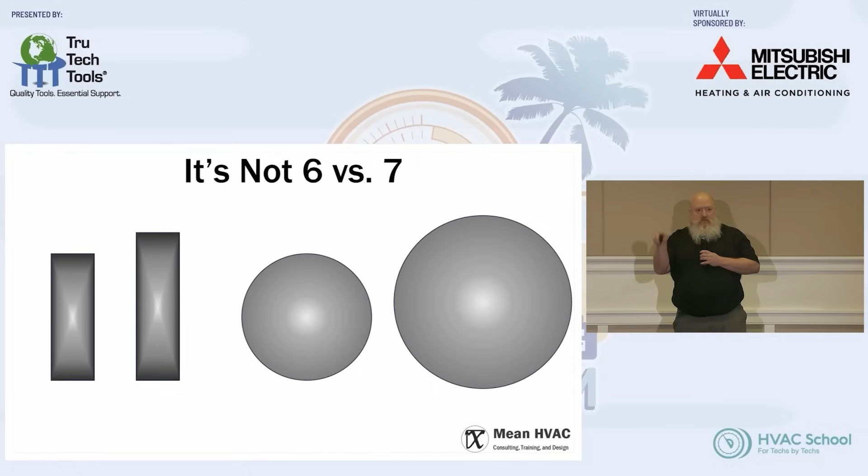So the difference between a 6 and a 7 is a 28 versus a 38. It's not a 17% change, it's a 36% change.

It's really easy to look at something and go, I mean come on, it's supposed to be a 7, they got a 6, it'll be fine - because 17% doesn't sound like that much. But it's not 17, it's 36.

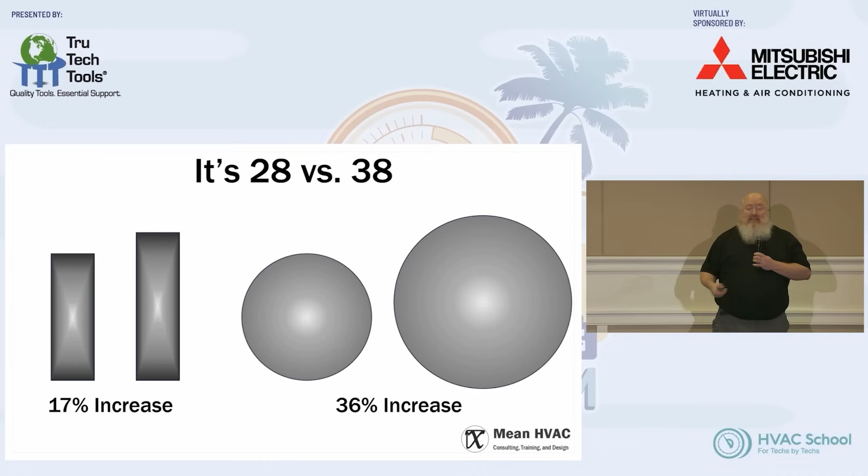How you size a duct matters. Duct sizes increase on the red line, not on the blue line - it's on the square, it's geometric.

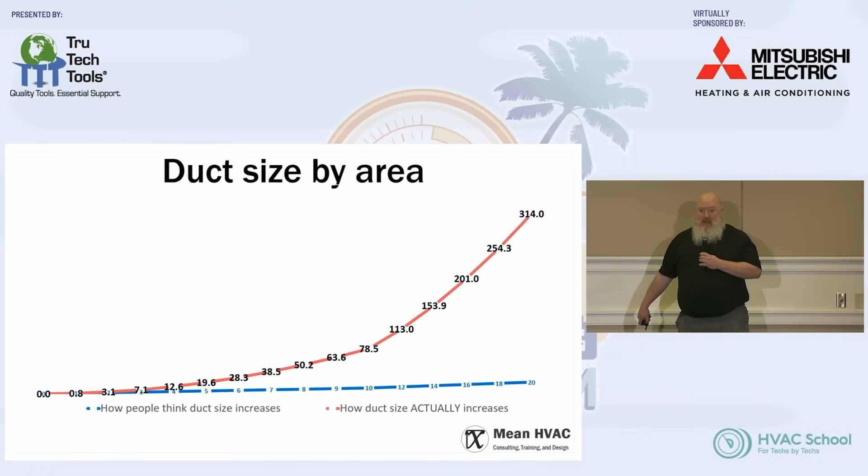This is where the David Bowie part of the title comes in - we're going to talk about pressure. Static pressure, velocity pressure, pressure loss, external static pressure - four unique concepts. Most of the time in the HVAC world, we just say pressure.

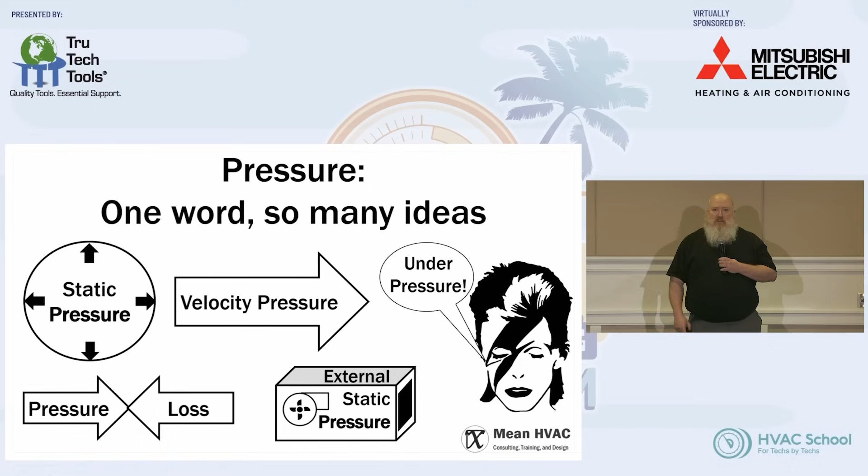There's no question whatsoever as to why this can get so confusing. If we're going to use one word to mean four different things, you are going to get confused.

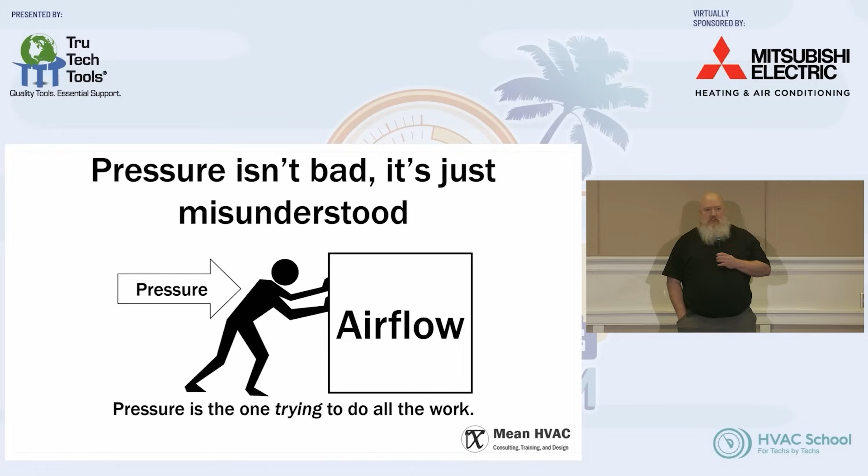First of all, pressure's not the bad guy. If you don't have pressure, you don't have airflow. Pressure is the one doing all the work. Pressure is the reason we have airflow.

We often say when we have airflow problems, we have too much pressure. Well, no, you don't have enough. You have too much static pressure or back pressure. But if you could create more total pressure, you'd have more airflow. Pressure is doing the work when we're talking airflow.

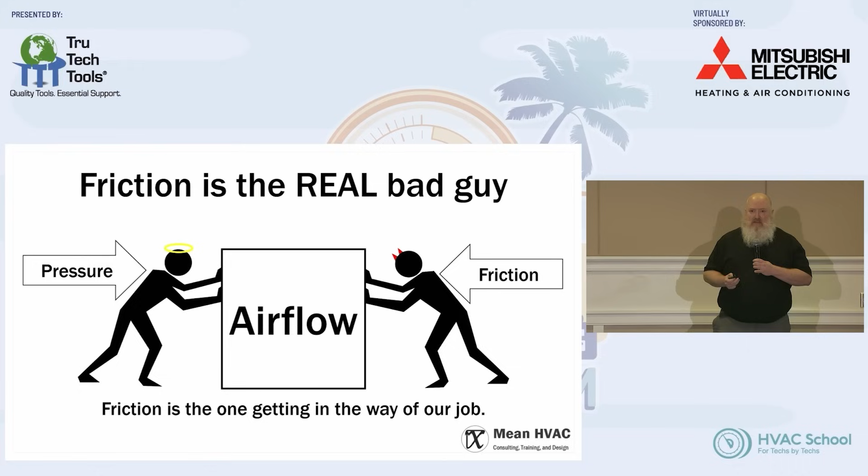Friction is the bad guy. Friction is the reason you're not able to do your job and deliver the airflow you're trying to deliver, not pressure. So understanding pressure is pretty darn easy.

I like thinking in terms of PSI, pounds per square inch - tells you exactly what pressure is. It's a force spread over an area.

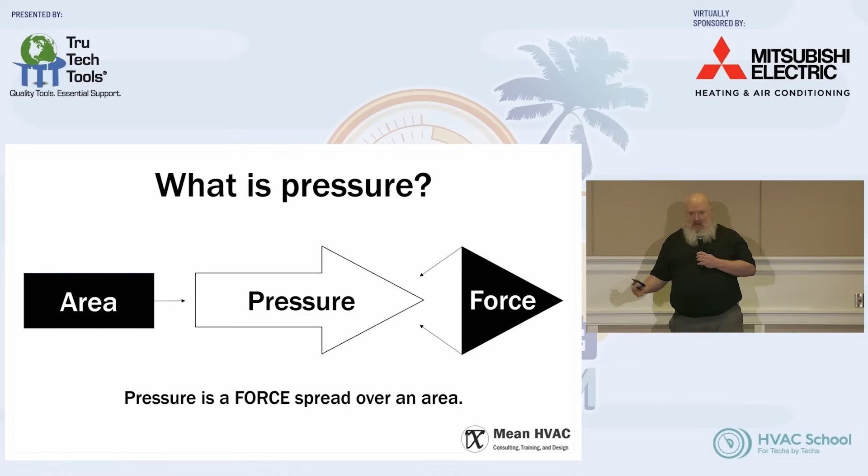Friction - anytime you have resistance to anything, that's friction. They talk about friction in financial markets. Anytime you're trying to do something and something's trying to stop you, you could call that friction.

It is really common to think that airflow is somehow caused by how much room there is in that opening. It has nothing to do with that - it's just accumulated friction, and it can be difficult to identify the actual problem.

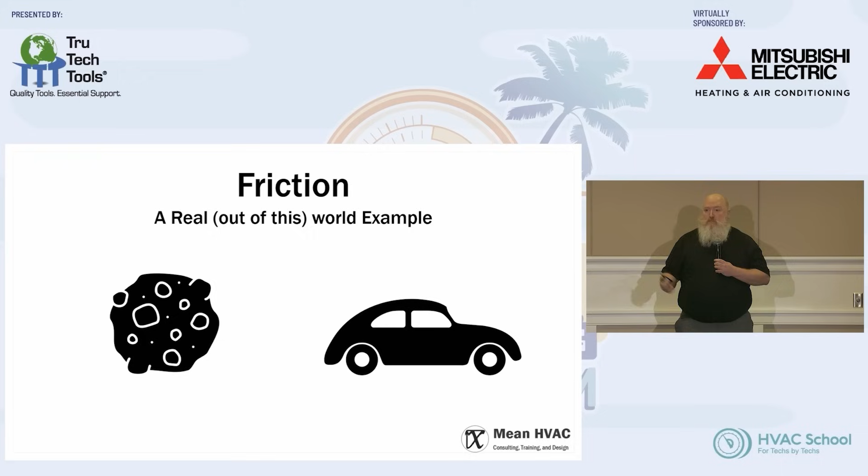One of the primers I like to throw out there is: imagine an asteroid the size of a Volkswagen Bug. About 20 of these per year come hurtling toward Earth. None of them hit the ground - they burn up.

A giant rock and metal object comes flying to the Earth, and the only thing that burns it to a crisp, vaporizes it, is the friction of the air moving across the surface. It's the same thing at play in ductwork on a ridiculously smaller scale - it's the friction of the air moving across the surface or changing directions.

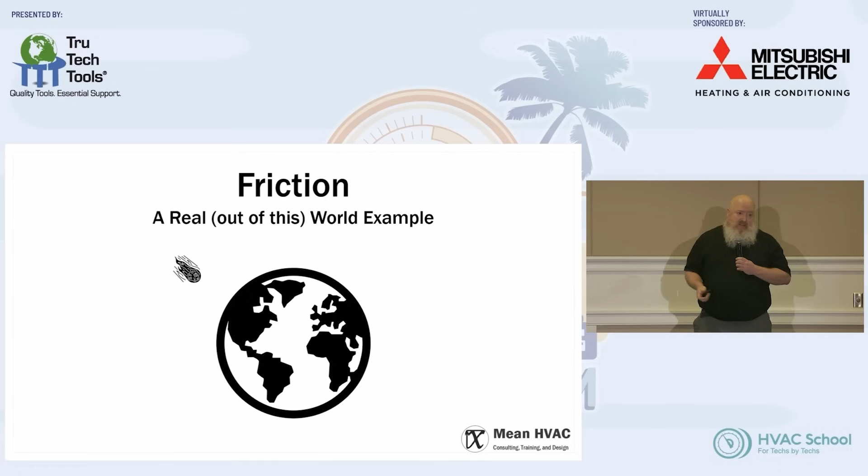So Ty Branaman and I - he's my man, he's my mentor if you will, or my idol.

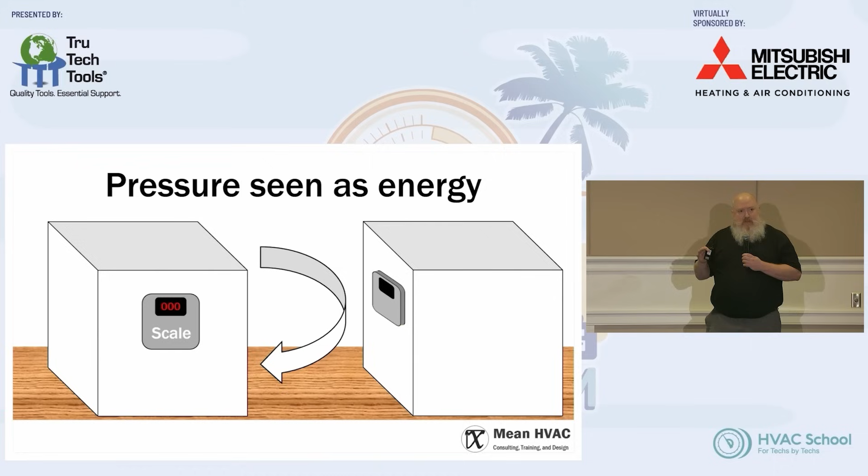Idol's a better word. Being able to visualize what's happening is really key to understanding, and air's invisible, which sucks. So if you want to understand pressure, maybe we should understand something a little more physical, a little more tangible, like a giant crate with a bathroom scale attached to it.

If you pushed on the scale and you were on a low friction surface, like a sheet of ice, it will move away from you pretty easily. And what's going to happen to the number on the scale? Not much. Because you're putting energy into the system and it gets used.

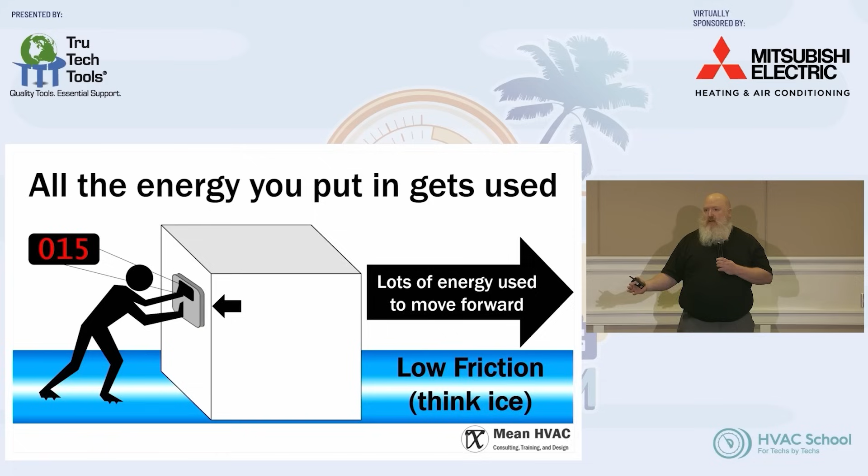It moves. The number on the scale goes up when the energy gets wasted to friction. And so when I push on it, it just flows away from me. The scale number doesn't do anything.

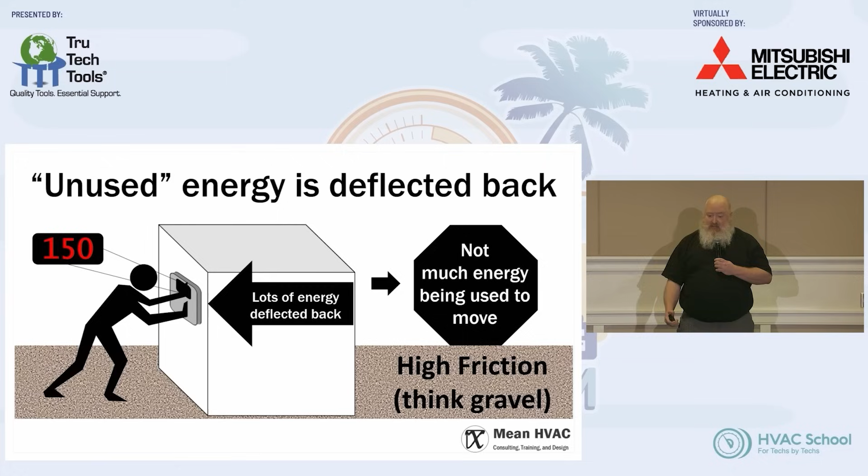If we put it on gravel, we can get a very different result. We could push the same amount, and it's not going to move very far. But that scale number is going to go way up, okay? Yeah, just physical normal sense, right?

The same thing is happening in a duct. We have the energy we use and the energy we don't use. Our job is to move air. When we're not doing our job, the air is doing something else instead of moving. It's being deflected. So I kind of need two hands for this little demo, but air isn't going to go in two directions at the same time, obviously, or two opposite directions at the same time. We can't have that in the duct.

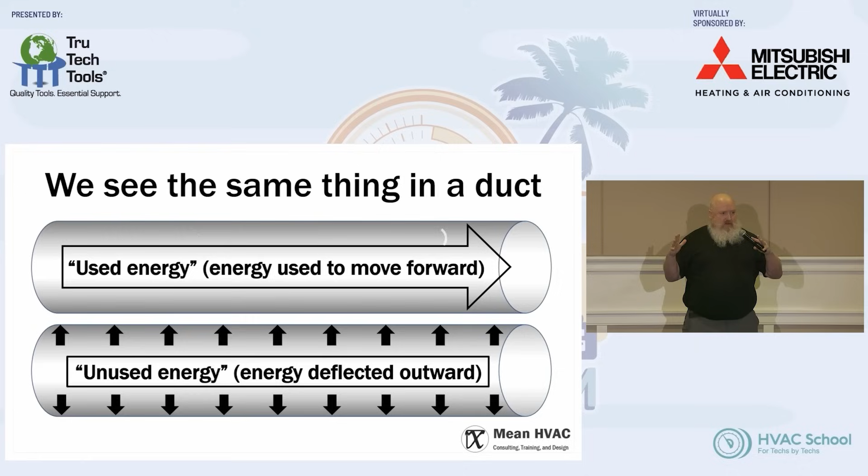So if I have a force going this way and a force coming this way, if it's the losing force, friction is the losing force, it gets deflected at 90 degrees. It pushes outward, okay? And a lot of you know this, we have names for that. It's velocity pressure, static pressure. Velocity pressure is the energy we're using. Static pressure is the energy we've lost, we've lost it to friction, okay?

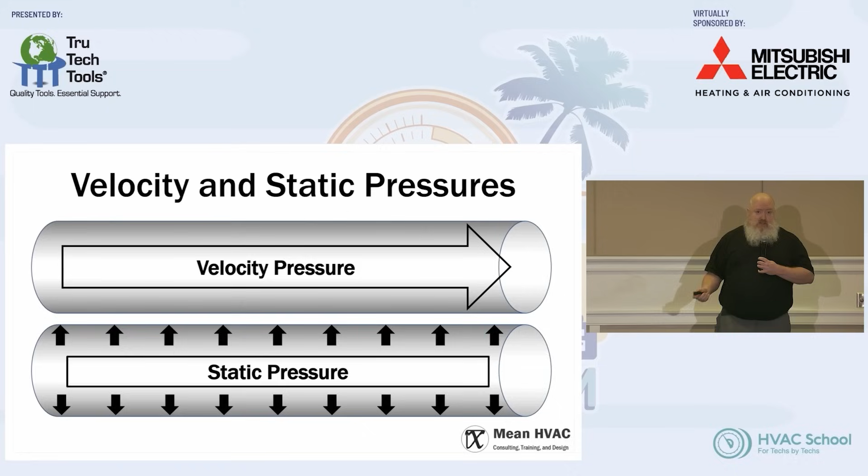So pressure is always in balance, right? Engineers like to say pressure is always equal. Oh my God, I taught people how to do manual D, and I was teaching them how to do manual D. I followed the process. I had no understanding of what was actually happening inside that duct system.

Legitimately, I didn't understand this until I got tricked into doing a presentation to a room full of engineers. And they didn't tell me they were engineers until the night before the presentation. It was the last time in my life I pulled an effective all-nighter watching YouTube videos trying to learn how this works. And when I figured out that pressure is not equal, because it's the same here as it is down here in the duct, pressure is always the same, or always in balance, excuse me, at that point.

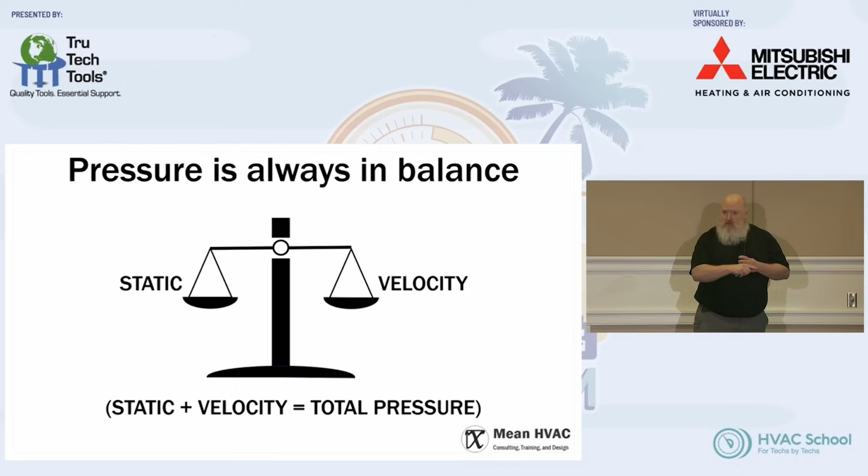At one point in the duct, you've got a certain amount of energy. Whatever you're using to go forward, you're not using to push outward. Whatever you're using to push outward, you're not using to go forward. These two things are in balance. It's one of those things where turning it into an equation is almost silly. This is just what happens. Of course it does, right? You can't use more energy than you have, and you can't use less. That's it. That's all it means.

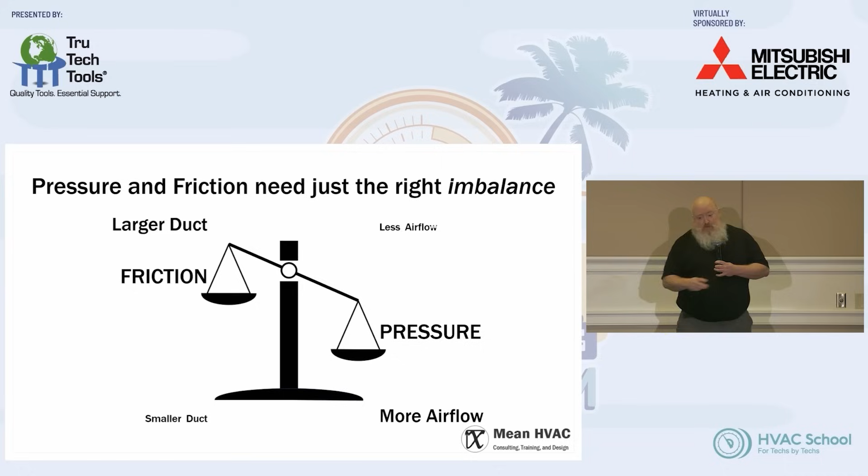And so we have two oppositional forces here. If you have larger duct, you have less friction. Smaller duct, you have more friction. And then you get the pressure side. Pressure's moving the airflow. If you have more pressure, you're going to have more airflow. You have less pressure, you're going to have less airflow. So this is Mr. Static Pressure right here.

It's silly, I know it. But if you want to understand static pressure, this is where the used car lot comes in. Legitimately, sometime after I did an all-nighter watching YouTube videos on pressure, I was sitting next to a used car dealership, and one of these guys was going. And it just randomly occurred to me that this is probably the best demonstration of static pressure and velocity pressure being in balance that you can see, okay?

When he's like this, all the energy is velocity. And so this one actually, I should have tested it before I brought it up here. The fan's a little overpowered on this guy, he doesn't like to dance so much. I have a different one I should have brought. He's just too small, because oftentimes if I hold him up just like this, he'll sag. You can literally see the inward collapse of the tube. But I don't actually need to hold this guy to make him stand up, right?

He'll fall over because when the energy is being used for velocity, it's not being used for static. So obviously he's puffy, even when I do this, but there's just less energy pushing out, which is why he falls. I can make him stand just by putting my hand over the top of him, right?

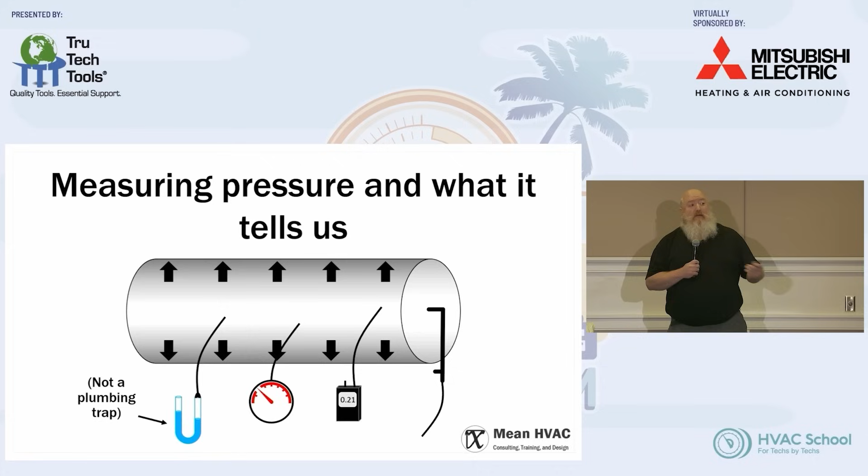But before we know it, static pressure is the only way we think about pressure, and then that just becomes pressure, and then what are we doing again? Velocity. You guys don't actually care about static pressure. You think you do. You care about velocity pressure, right? Hydraulics engineers, they care about static pressure. If they F up static pressure, something blows up, okay? I've only seen a picture of one duct system where they swear it blew up from static pressure. I still am not 100% buying it, but okay, right? Velocity pressure is our job, not static, okay?

So why do we use static so much? Well, because if we're gonna control our airflow, we can control our pressure. That's just the blower, right? How much power do we got? Or we can control friction, okay? And friction actually comes from multiple sources. It's not just the surface of the duct, right? So you might have some smooth, like metal duct. You get a little friction from that. You might have some flex duct, which, by the way, not the devil, right?

Flex duct works great if you account for the fact that it creates more friction. You just need slightly bigger ducts, right? Because they're gonna create more friction. I can create the same friction with a flex duct this size as a sheet metal duct that size.

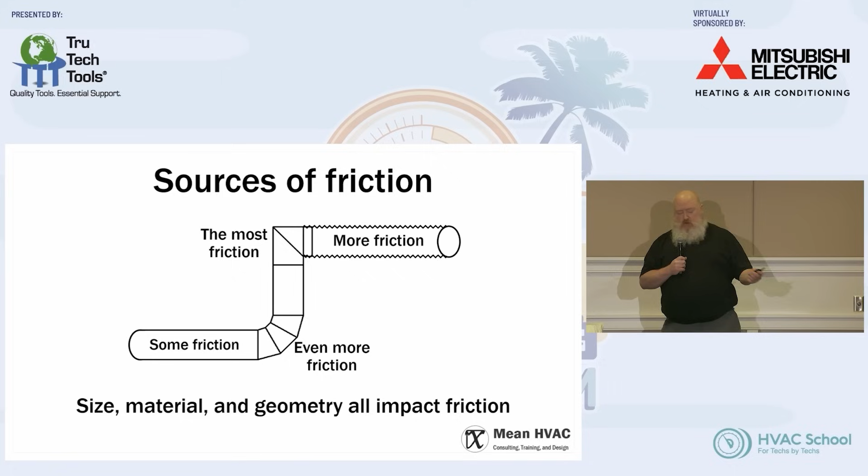But where most of the friction comes from is actually the fittings, the changes in direction, right? It doesn't even have to be a fitting, it's just a change in direction. If you have a piece of flex duct and it's got a turn in it, we're gonna call that a fitting for the purposes of this conversation.

When the air changes direction, it's gonna create more friction. So we have a term we use in Manual D called equivalent length. You use it all over the place in engineering, it's a really simple concept. If a fitting creates the same amount of friction as 80 feet of straight duct would, it's an 80-foot fitting.

Now that may be in fine print, there's a bigger version of this where it's at a certain friction rate and a certain velocity. With the actual mechanics happening here, the actual math - I hate doing the math, I don't need to. They have calculators, they have software, we can get that stuff. The actual math is a lot more complicated than that, but that's how we estimate the effects on flow.

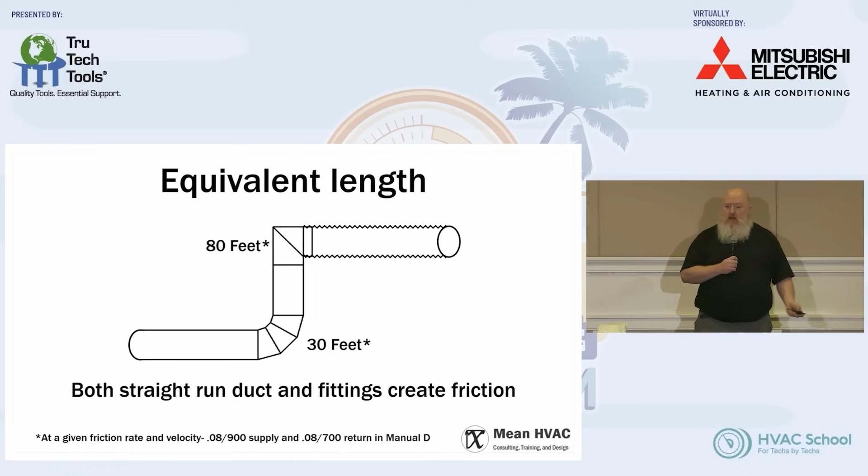So it turns out that in residential, it's a little easier, or a little more realistic, to expect to manage friction than it is to manage pressure. Because this is my blower, and it's pretty much the one I got. So I need to manage something, and I forget what business guru said it, but you can't manage what you can't measure. So how do we measure friction?

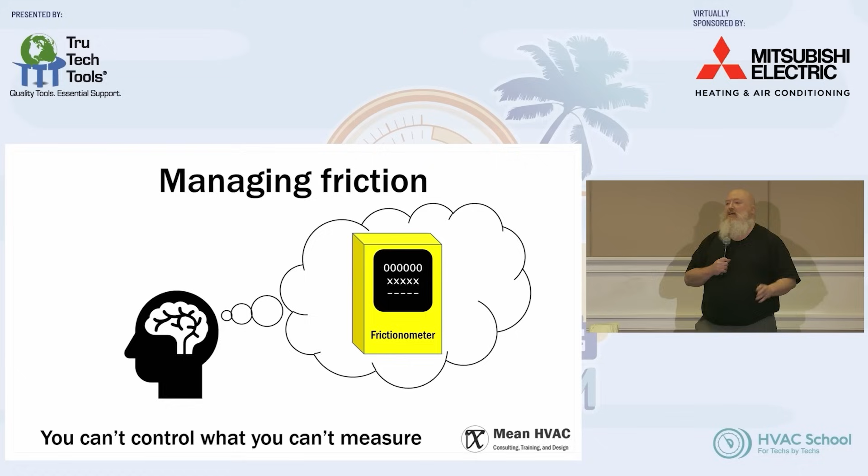There's no such thing as a frictionometer. That doesn't exist, right, Tru Tech? No such thing? Okay, just making sure. They would probably have one if somebody did.

So in order to quantify, measure, and control our friction, we actually use pressure measurements to do it. So if I have a magical duct with no leaks - where's Doug Crawl? If he's around here, he'll make me a duct with no leaks. He's good at that. And if there are no leaks in this duct, with all the gores on that fitting, that's kind of tough.

If 100 CFM goes in, 100 CFM is going to come out. Has to. If less air came out, it would eventually explode. If more air came out, it would implode. Those two things don't happen, so 100 in, 100 out.

Took me a while to realize why some people have a little trouble with this. They often think of the air hitting that fitting and slowing down as a result. I get that - I like to think those people are thinking of airflow as a race on a track. The cars start at the starting line, they start driving, they encounter the corner, and they slow down because of it. The problem is there's already air in the duct system the moment the blower starts.

It's not a race, it's a traffic jam. If we all parked our cars on the highway at night, and in the morning all walked out to the cars, and at exactly 8 a.m. started the cars and started driving, you're in the traffic jam already. Whatever problem there is to the flow becomes your problem. I don't care if you're 10 miles back.

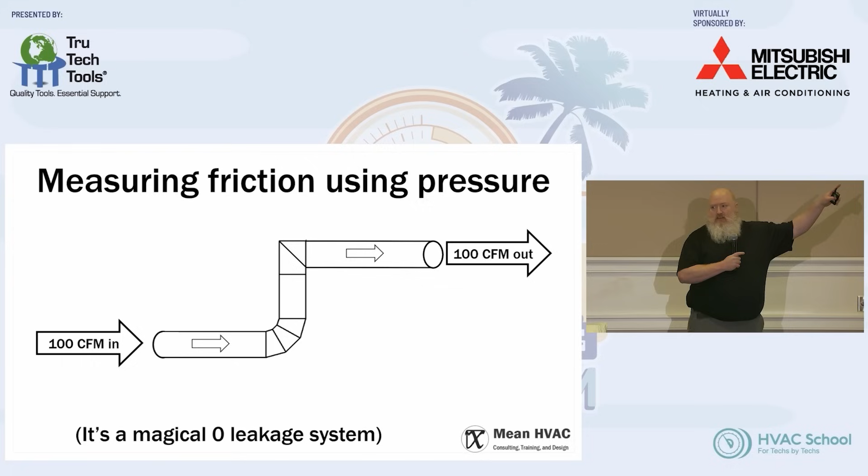The reason that's important is what we're going to do is measure static pressure. If I have a certain amount of energy at the beginning and less energy at the end, and velocity pressure and static pressure are always going to balance out, where's that disappearing energy going? Because it's not being lost to velocity.

There's 100 CFM coming out of it. It's got to be going the same, important word here, average speed, okay? So the velocity pressure didn't change. That means all of the change happens on the static side, okay?

Static pressure loss or static pressure drop. You've heard the term before? Yeah, it's a measure of friction. It's exactly how much friction there is between those two points. If we have the same velocity, whatever energy you lose to the static side is however much energy you lost the whole way, okay? So when we use pressure losses or pressure drops, that's what we're saying. We're saying there's this much friction happening across that coil, across that filter, whatever it is, right?

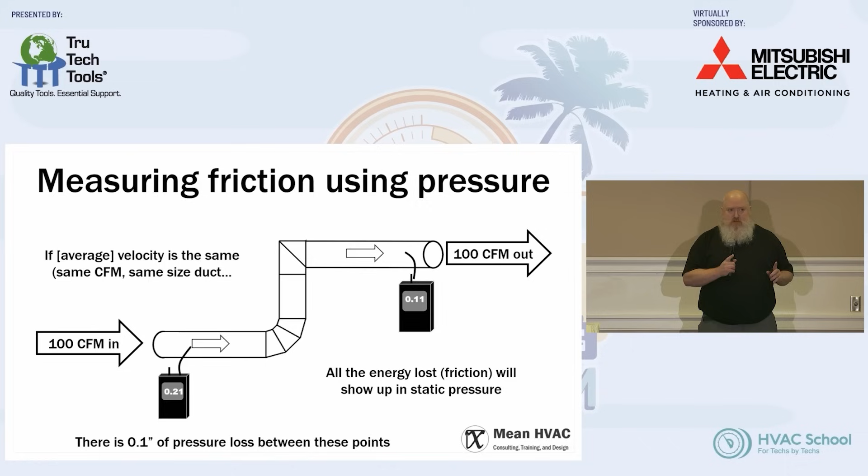There's a reason you can't take a static pressure reading in the supply plenum and in the branch and know anything useful, okay? Because they're completely different conditions, right? Different amounts of air, different velocities, different everything. You have to isolate a variable to get something useful. As long as you have the same amount of airflow and the same size, the pressure difference between those things is measuring friction, okay?

So that's where this thing comes in. All right, guys, what number should we use? Anybody want to just throw one out? You know I'm just going to shut it down, but okay, I'll spare you. There isn't one, okay? There isn't one.

Yeah, there's a little marker on it and everything.

My instructor. So, fun fact, little bit about my background, which I skipped. I was the head trainer for Wrightsoft for many years. Brace yourselves, everybody, I've got a degree in English, communications, and philosophy, and 20 years of experience teaching people how to design stuff, and a curious mind.

I did not like teaching people things that I didn't understand, and so I tried to understand them. And duct was the last piece for me. It was the last thing that fell into place, for sure. And I paid, this is part of the reason, good money out of my own pocket, right? I started at Wrightsoft. They hired me as a temp. I just wouldn't go away, right?

I paid money out of my own pocket to go to a class on a Saturday to learn 0.1 is a magic number that will always tell you how much airflow is in a duct. No, not even close. I went to another class, got taught the same thing. This time I could ask questions. I was like, wait a minute, isn't a longer run going to give me less airflow? Aren't there certain fittings that are going to cause less airflow? And the instructor did what a lot of instructors will do when they're asked a question they don't know the answer to. They give you a confusing answer.

So, hope you shut up. He said, well, it's per 100 feet. Well, that shut me up. I didn't know what the hell that meant, right? Is every duct system 100 feet long? Why 100 feet? I got to guess. Because 10 feet wasn't long enough for Willis Carrier to measure the difference in the column of water he was using. He didn't have a DG8, he had a tube of water. And he was going to use 1, 10, 100, 1,000, something you could divide by 10 because he's an engineer. So, per 100 feet. And thus shall it be forever and ever.

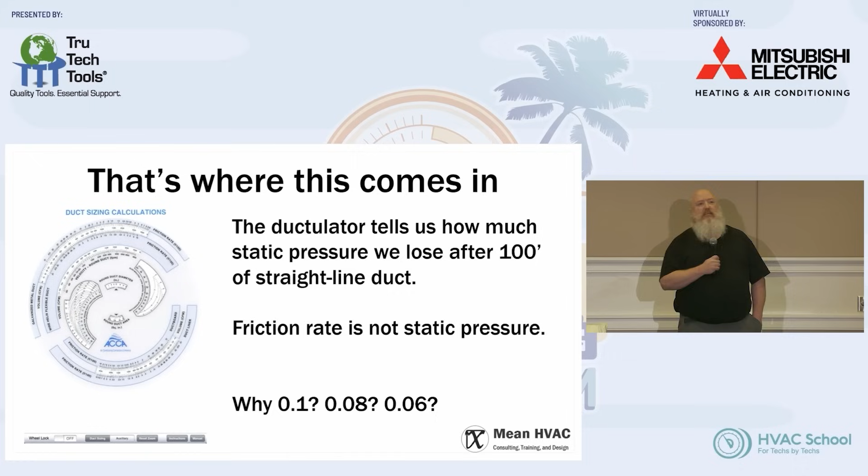But it doesn't mean anything special. There is nothing special about that number. 0.1, 0.08, 0.06. You put a gun to my head, you make me pick, I'm going to say 0.06. Why? Because if a duct is bigger, I can close a damper and get less airflow. Resistance, friction, cheap and easy. Pressure, expensive and difficult, right?

You want more fan power? Well, I hope we're not on the highest fan speed because you might be out of luck. I want more resistance. At one point, Wrightsoft was owned by a company that also owned a sheet metal company. And talking with those guys, they told me that when they punched out the round hole in the back of their boots, that's usually a piece of scrap. And then some customers started asking for those blanks. And they started selling them in packets of 100.

Why? Because when there wasn't an accessible damper, guys would take the little blank, fold it like a taco, reach it up inside the duct, and create a damper.

I'm from Massachusetts. Something most Southerners don't know about Yankees is we love a good hack. Absolutely love it. I know most of you are like, that's bad craftsmanship, but it worked, right? Friction is easy to create.

So when you do a residential duct design, you're working backwards, which is why it feels weird and wrong. You wouldn't notice it as working backwards if I was talking to somebody who had never done a duct design before, never learned anything about airflow.

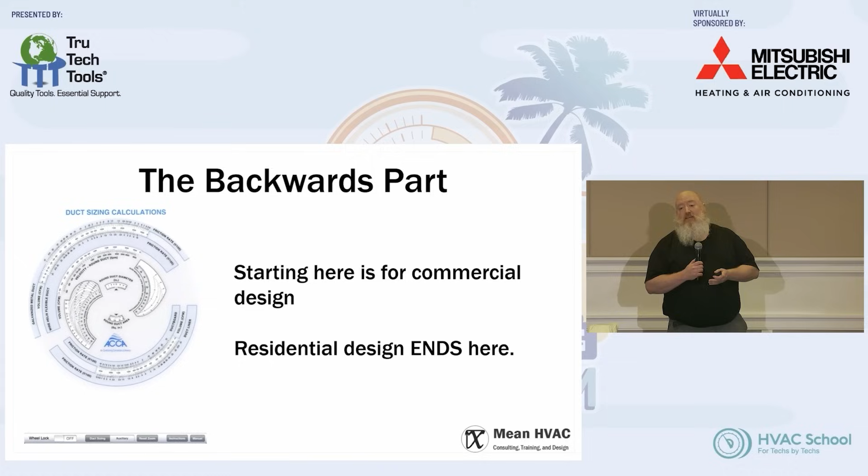Because they get you thinking about this from the friction side of it, since that's what this is. There are two ways to control airflow: you can control the pressure, or you can control the friction. Another way of looking at that is you can control blower characteristics, blower selection, or duct sizing.

In commercial, if I need a different motor to get more power, I'm allowed to do that. In residential, you're not. If I need to change pulley configurations and all that, I can do all kinds of cool stuff to a commercial system. If you need more power, you just get it.

Commercial duct design feels weirdly arbitrary. You sit down and use 0.1, that thing they taught you, 0.1, yeah, you do that. You just take 0.1, you do a bunch of math.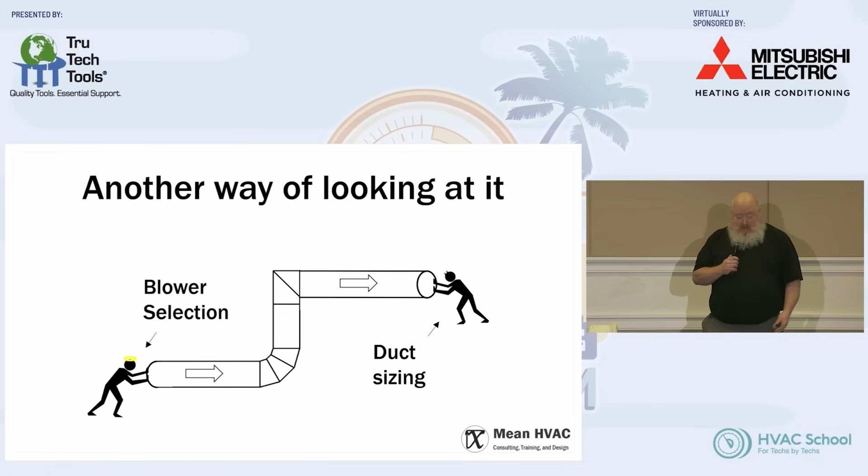But there's a whole process that's supposed to come after that. You're supposed to use that 0.1 in the Ductulator to quantify how much friction you're creating with the length of duct you're running, and it's per 100 feet, it's 0.1. If I had 120 feet of duct, it'd be 0.12 inches of pressure drop. That's what it tells me. That's what friction rate is for.

So I could document that. I could write down 0.12 inches pressure drop. And something magic happens when you've already decided what size to make your ducts. The thing I was telling you about those fittings, you need to know the velocity and the friction rate to actually know literally how much pressure drop there is. Well, if you just decide ahead of time what size to make the duct, you know those things.

There's a little database online, ASHRAE has it. You can calculate the pressure drop, not equivalent length pressure drop, of every fitting, and you could do something crazy, like write it down, and add them up. Then you have things like coils and filters and other things that cause friction, and they have data too. You can look up: if I move this much airflow through it, or move the air through it this fast, how much pressure drop will there be? And you can write that down.

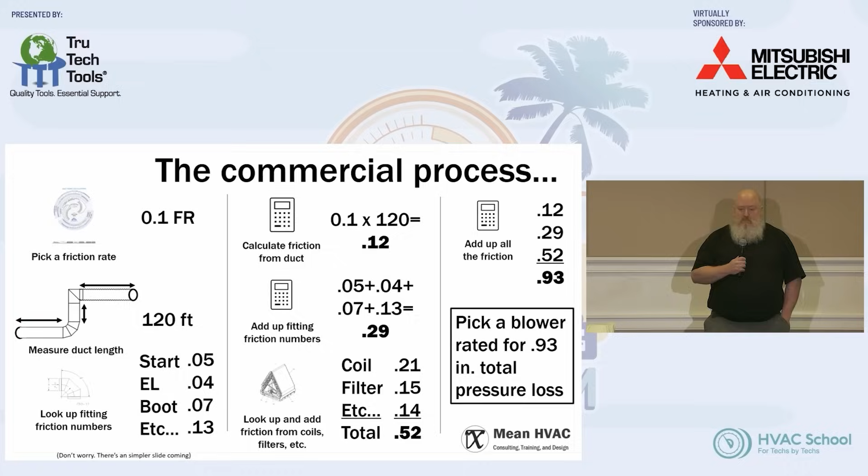Then at the end, you add it all up, and that's the blower you need. Done, that's the goal. When you start with 0.1, when you start with the Ductulator, you're supposed to end by changing what you do with the blower to meet the needs. You know how much friction you have, you adjust your pressure so that you achieve the right balance. Technically, it's the right imbalance, but 601, right?

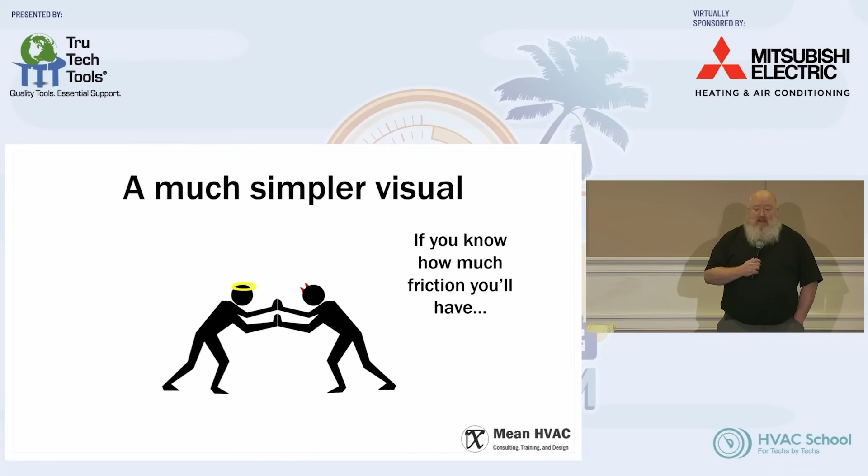In residential design, you're stuck with your blower. This is it, this is the one I get. And customers have budgets, nasty little budgets. We hate those. We can't just buy the best thing out there. Well, some of us can. You guys are picking your clientele, though, pretty hardcore.

So you have this blower, and it can do so much, and that's all it can do. And they're not all created equal. Side note: the thing that's on the nameplate on the unit, garbage, okay?

I'm convinced it has something to do with liability or something, because there's a table in the data that tells you what the actual airflow will be at a particular speed, at a certain amount of what's called external static pressure. This is the amount of resistance this fan can handle. ESP, or external static pressure, is a measurement of fan power, and it's something you just look up.

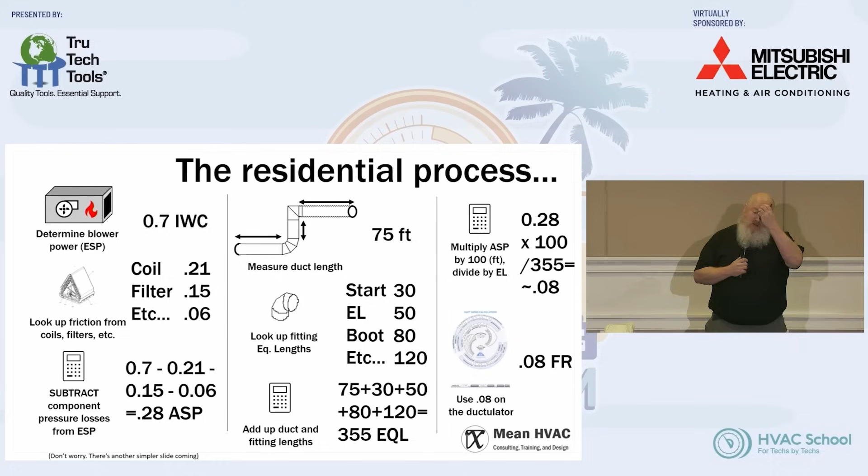So you do that instead. Instead of deciding what size ducts to start with, you decide what blower you're gonna start with. You take that and do the same thing. Stuff causes friction, and there's certain things I can predict, like how much air is gonna go through my coil and filter and some other things. So you subtract that - this is how much my blower can handle after it moves air through a coil and a filter. Here's how much is left - they give that a fancy name, the available static pressure. It's just what's left, how much energy you have left over to move air through the ducts.

That's what it is. So you measure those ducts - how many feet of duct do we have? We can do a little fancy math here. I'm leaving out a concept, the worst case run or the longest run - it's unnecessarily tricky for just understanding the principles of airflow. But long story short, it's the fittings that get you. Something with 4 elbows in it versus a country mile.

I design duct systems, side note. I design duct systems - if by some miracle there's a homeowner watching this, I don't design duct systems. You didn't hear that, I design duct systems. I won't work for homeowners. I'll work for you guys if you really want, and I'll probably try to talk you out of it and give you somebody else.

But when I design a duct system, I get a lot of - terrible pun - back pressure from my customers. Because if you're gonna give me a stupid place to put the air handler, which they always do - not you guys, the architects - I will run a straight trunk that's 3/4 of the side of the house and just run really long branches to the other side. Now, I don't have to pay for those materials, so I can see reason, I can be talked to, but people look at that and say those runs are too long. Well, if you took 2 elbows to get there, they'd be even longer than the extra 10 feet I add, because most elbows are around 50 feet worth of fitting. So for every elbow you're adding that length of duct.

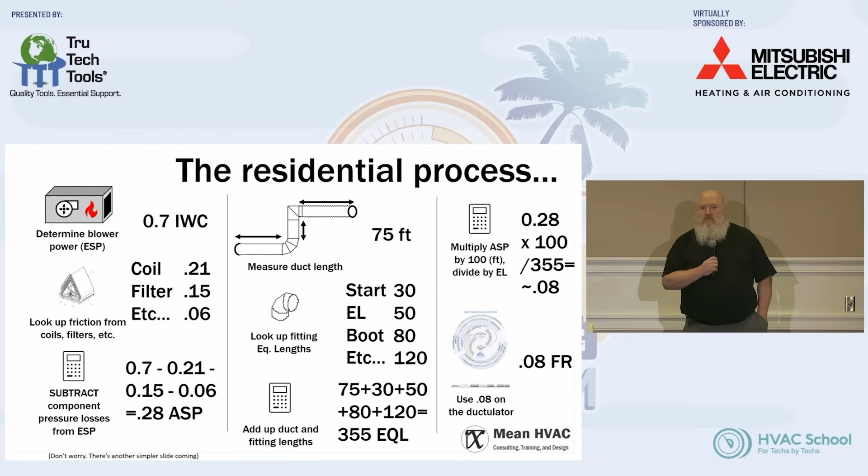You're designing not to make the ducts happy. Point one's great - point one is where the sound is mostly under control, until the velocities or airflow get super high. It's economical - you're using relatively small ducts for the airflow. It's awesome, but the problem is you just can't get away with it in most modern residential systems. A gentleman who presented at this symposium a couple years ago, Rick Sims, likes to talk about the 'war on sensible' - I love that term. However, that's a whole other topic we're not going to get into.

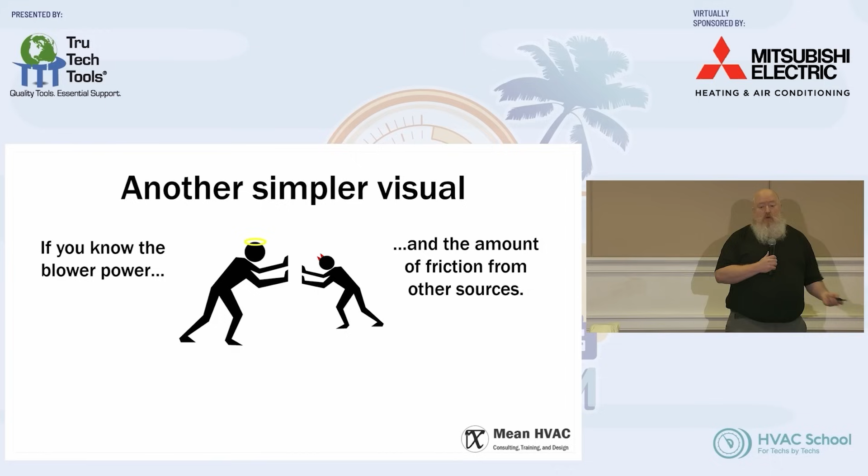There's a war on blowers also happening, right? Every damned thing we do to our systems is making it harder to move airflow, and 0.1 just can't keep working. So you know where this is going. If I know what my blower power is, I can attack the other side and create the balance I want, but I'm gonna have to adjust that friction, okay?

So I try to go out of my way. I actually taught a thing here a couple years ago about unteaching people things. The key to telling people that they're wrong is to start with, you're right, okay? And when it's true, by the way, it's very effective.

So when I have somebody telling me that those duct sizes are too big, I will say, well, you're right, these aren't 0.1 ducts. And 0.1 used to work. Well, most of the time anyway.

Because back in the day, a 2-ton house here in Florida, what are you gonna put it in, a shed? What do we put a 2-ton in? We had to special order a 2-ton. Which, not true, but special ordering a 1.5 ton in Texas, very real, back in the day. Now, that 2-ton unit is covering a 2,000 square foot house. Look, most of the resistance is in the fittings, but that's just a longer run, right?

Filters used to keep the cat out of the furnace, right? The job of the filter used to be to keep the coil clean between maintenances. That was it. Now we're cleaning the air, or at least attempting to, and it creates more resistance. That's not a surprise to a room full of HVAC people.

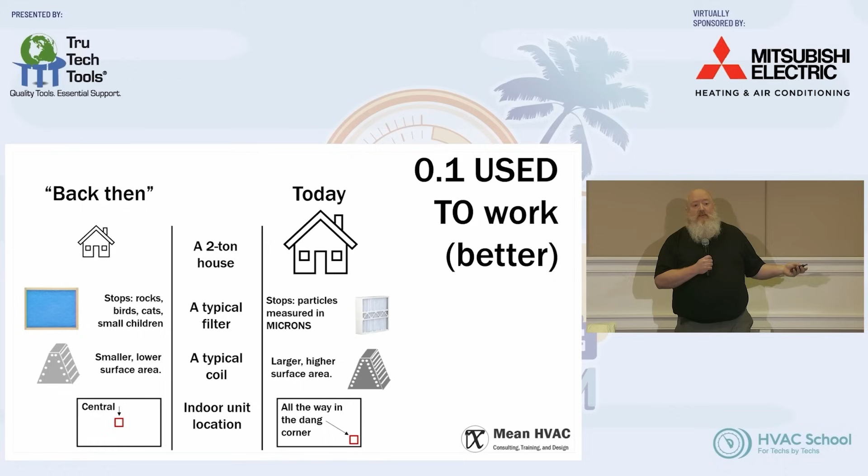And so if these things, when there were little houses and throwaway filters or non-restrictive filters and tiny coils, 0.1 worked. It did. But we've been using 0.1 for so long, we're sort of the boiled frog, right? If you haven't heard that expression, it's the temperature goes up slowly and you don't notice the temperature's going up, and it eventually kills you. Things just got worse so slowly that nobody really picked up on it.

And the kick in the pants, this is the you're wrong, but it turns out you're right: an oversized air conditioning system on an undersized duct system has a lot of things going for it. I mean, it's terrible, don't do it. But it's terrible in a way that the homeowner doesn't complain.

I occasionally get the opportunity to talk to people who are sort of bigger picture thinkers, the building science community. A couple things I like to point out to them: number one, there are very few people who get out of bed in the morning thinking, I'm gonna do a bad job today, okay? Two, this massive underestimation that many experts have of your average HVAC contractor is literally wrong. It's so wrong, it's coming back around to right again.

Because what they fail to understand is that you guys are craftsmen. That is your job, to make it work. You show up to somebody's house, the homeowner is not happy, your job is to make them happy, and you have a whole set of skills that can do that, right? And so what, they end up with an overcharged system. They're not complaining anymore, they're a happy customer, and they didn't have to spend $10,000, right? Unfortunately, that stuff can kind of bleed into our everyday practices.

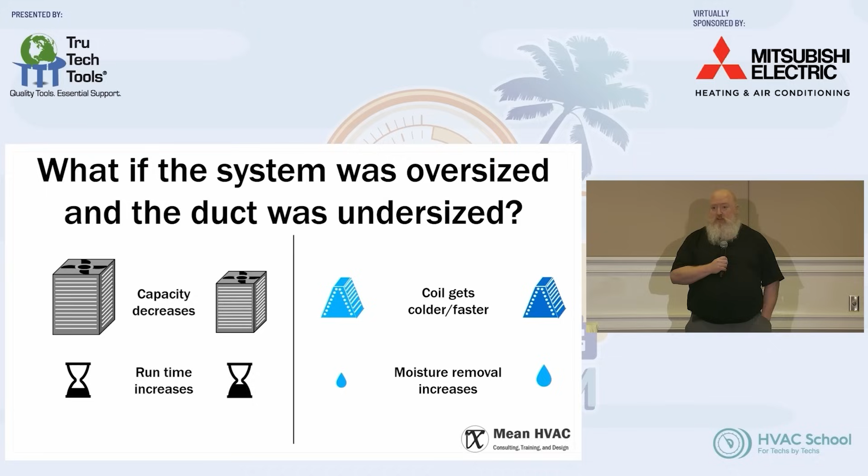So if I oversized a bunch of systems and never changed how I did things, I'm just gonna keep putting 3 tons in this house and keep using 0.1. That would work for a surprisingly long period of time in home upgrades, if we're sending techs out there to solve the frozen coil problem by adding refrigerant, which we probably are.

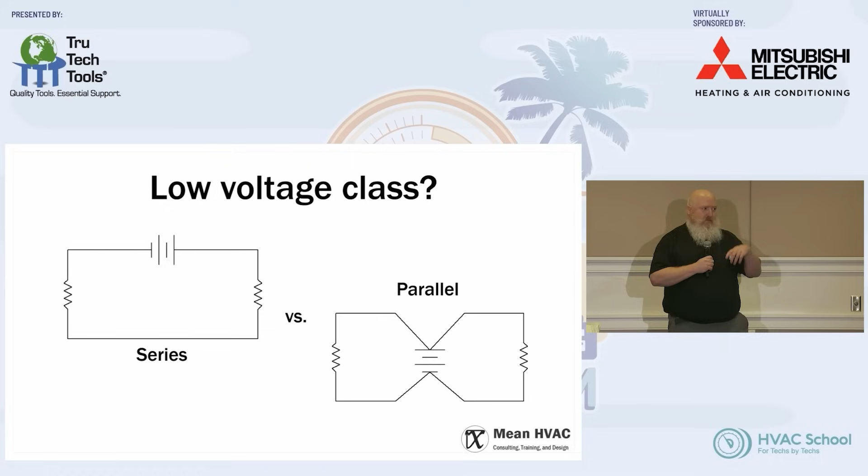So, little side note on the blower location thing. You may remember from any electrical lesson that resistance adds in series, not in parallel. When you reduce the flow, you reduce the resistance. When I have more flow on the left, I have actually 4 times as much resistance, but let's not get into that. You have more resistance than you do in parallel.

Well, ducts are the same thing. It's just a circuit. In fact, that's a really useful thing to remember—it's not the topic we're doing today, but a blower is a circulator, not a pump. The supply end is connected to the return end, it just uses this big space to connect them. It's just a big circle. It's literally a circuit, minus the leakage to outside.

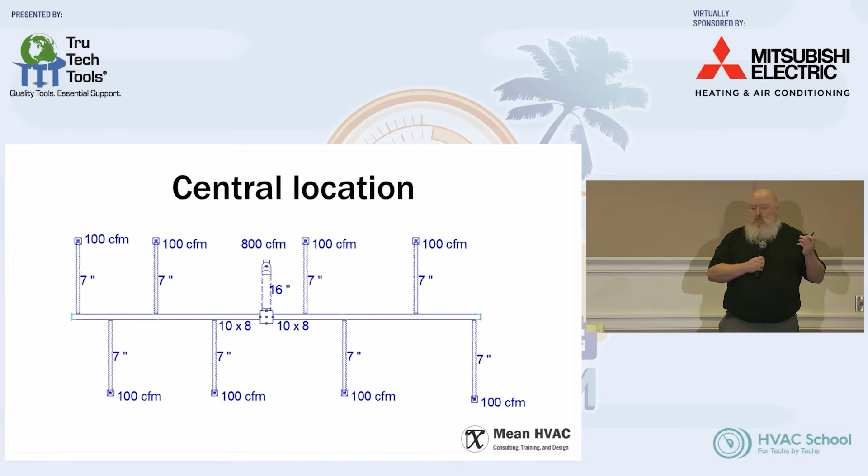So when you have something located in the middle of the house versus in the corner, what you have is a short path for that air to flow, and each of these outlets is a separate parallel circuit. My longest path is this—that's the longest the air has to go to get all the way through from supply to return, all the way through the system.

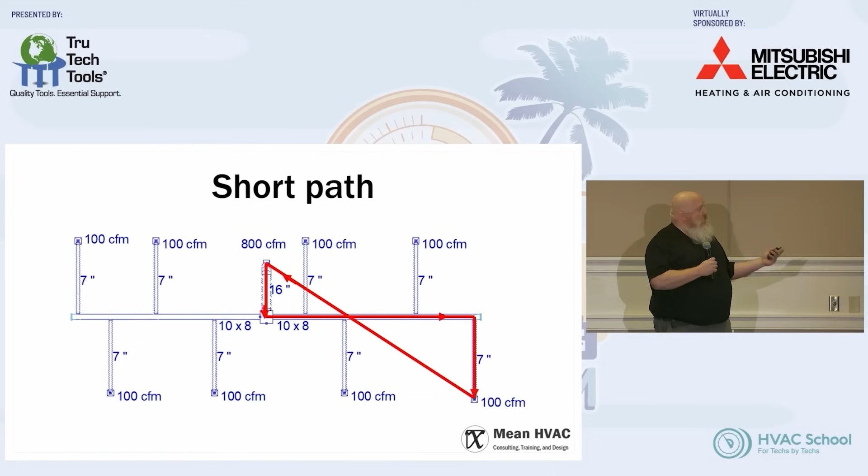Now this was designed by Manual D using some pretty run-of-the-mill numbers here. Note those supplies are flex duct, so they're 7s and not 6s—they might be 7s even if they're metal. You don't know until you do the math, but if I was doing the math properly, a lot of those 7s need to be 8s.

Because the run is longer, and the friction created—remember it's all about the friction you create—moving through more of that duct creates more friction. There are twice as many fittings in this path as there are in the short path. So I need bigger ducts. I can't use a 16 on this one for my return, it's gonna have to be an 18 because I'm asking more of it.

That said, it's a pipe dream. You can ask your clients anything you want, but if you could just get them to understand—if you have a builder client you work a lot with—that it's central air, not corner air, everybody's job gets easier. We don't have these giant ducts we're gonna have to find space for if you let me put it in the middle. We'll be cutting the path in half and cutting the resistance, everything can be smaller, it'll be easier to put this thing in your house. It's not a real effective way to get that done, but anytime you can build the relationship with that builder to get them listening to you, this is one of the things that they can do to make your job easier.

So I have some other slides on some other topics, but this is the core material, and I wanted to create a fake stopping point here for people to ask questions, if we have any.

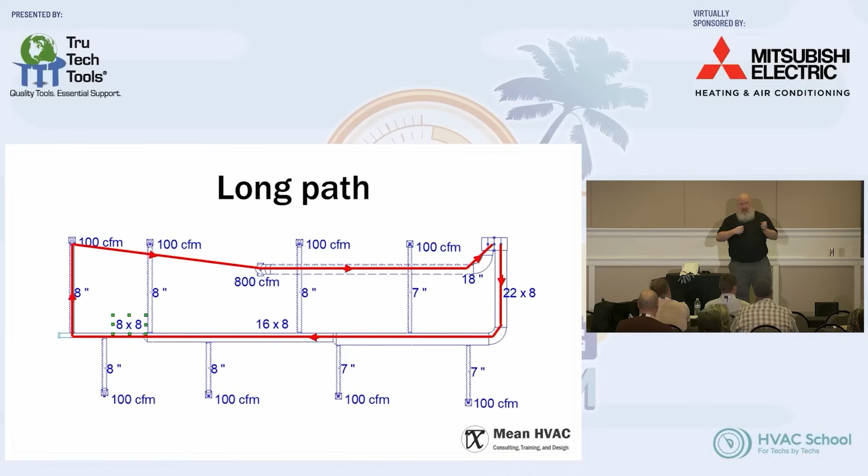So if you're trying to design for a dedicated dehumidifier, like a whole home dehumidifier, and you're doing a direct return, and then supplying the air into the air conditioner - so the dehumidifier is sucking its own air, it's got its own return, but you're adding that CFM into the ductwork - do you account for that added CFM when you're doing the duct design? And are you worried about if it gets too big, so the actual dehumidified air doesn't move very well?

Bonus points for the question. That's a really interesting question. Yeah, there's a lot going on there, right? I would say your biggest concern is overcoming the static pressure in the supply.

Manual D is super simplified. The factor involved is where you change the size of the duct and the amount of air in the duct, the amount of resistance you get out of those fittings changes a decent amount, right? And when you look at a modern system versus my example of a bad one, the resistance you're dealing with is typically going to be much higher than what Manual D is going to give you.

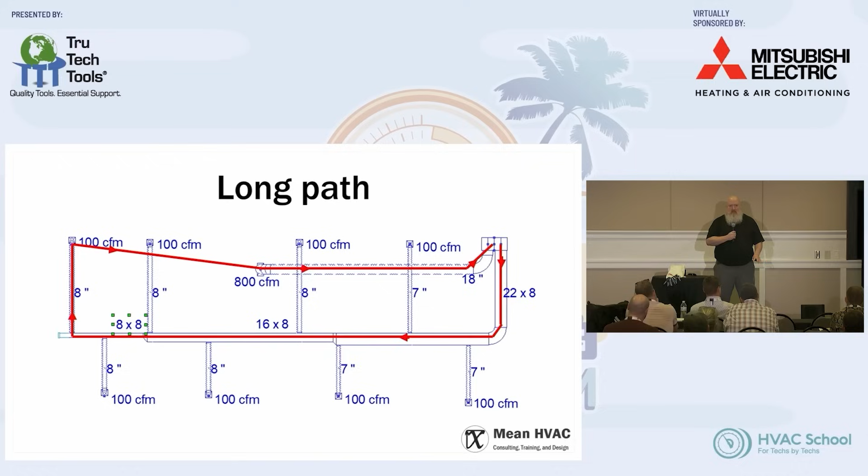Manual D is going to design for half an inch of water column on an air handler, on a furnace. Good luck with that. At the end of the day, on an install, if you set it to the fan speed you planned on, if you saw 0.5 on the manometer on day one with a clean filter, I'd eat my left shoe. It's not going to happen.

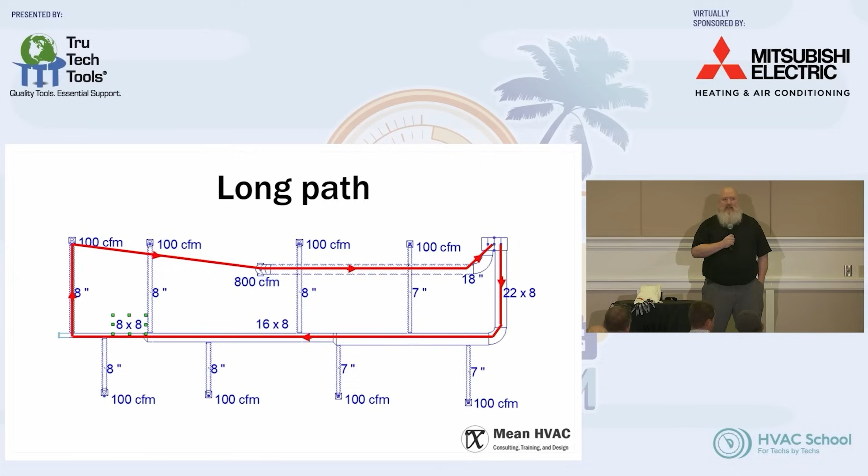Manual D is built with enough wiggle room that the second key thing I'd pay attention to is the disparity between the amount of CFM in the supply and the dehumidifier. So if I'm injecting 120 CFM onto a 1.5 ton system, you should change your design CFM. If I'm injecting 120 CFM into a 1600 CFM system, it's going to be in the margins of what Manual D is doing. But your biggest point of friction, no pun intended, is going to be actually getting 120 CFM into that supply against that back pressure.

That will be your biggest problem. Once you're planning to do that, your biggest problem might be that you sized all this ductwork correctly, but you've designed a system that's going to create 0.4 inches of static, and your dehumidifier can only supply 0.3. You're not going to get any airflow. So I think it would have more to do with that overcoming pressure problem than the total CFM you're calculating in the airflow.

Other questions? All right, let's go to bonus material. Northerners. Oh my goodness.

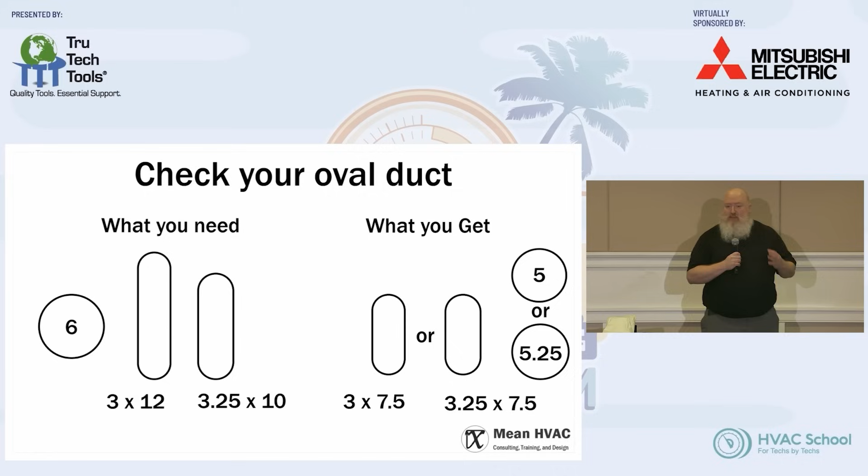Yeah, they sell you duct called 6-inch oval. It is not anywhere close to a 6-inch duct most of the time, okay? First of all, the metal manufacturer is just kind of winging it. You get one that's doing 3-inch, you got one that's doing actual 3 1/4. This guy overdoes the 3-inch because, we don't want it to make the sounds or whatever, so we make it a little smaller. Okay, great, you make it smaller. You know what happens when you make it smaller? Less airflow.

If you actually look at the dimensions you should have for a 6-inch duct, it should be somewhere, if it was a 3-inch, about 3 by 12. 3 1/2 or 3 1/4, about 10, so 3 1/4 by 10. What you get is about 7 1/2, whether it's 3 or 3 1/4. You're getting a 5-inch duct. You can pretty much take a look at all that oval duct going up the wall and just size it to the next one up as a way of anticipating this.

But it's another example, I don't know who considered this. I have a theory that they took a 6-inch duct and hammered it into an oval. I have a theory it's like the same perimeter. It's actually not, I've done the math. It's somewhere in between. But originally they took a 6 and smashed it into an oval shape, and that was called a 6-inch oval. That would be a lot closer than what you actually get when you buy those oval ducts in round size equivalents.

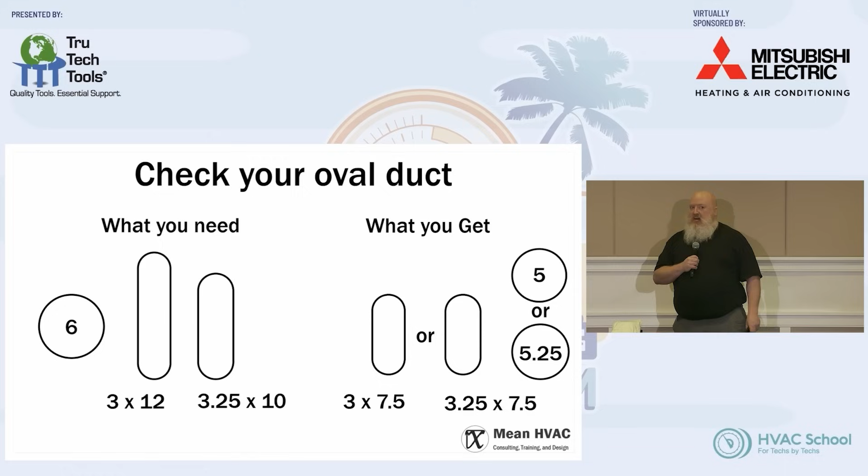We get blamed for a lot of stuff that's not really on us. It's not unreasonable to think a 6-inch oval would be the same as a 6-inch round.

How are we doing? So we're at a dead stop. Okay, well, there's a mystery. Come find me at lunch, I'll tell you which one is better.